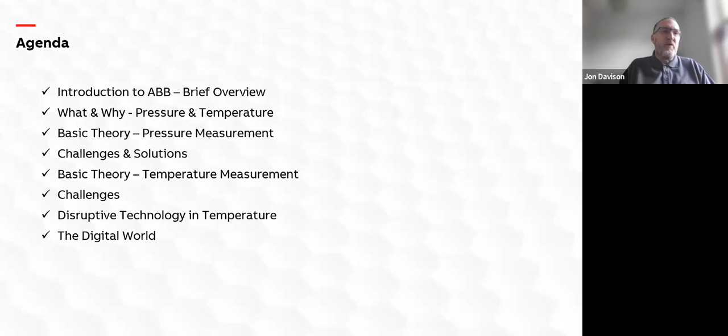And I love a measurement challenge, so please, at the end, if you get questions, throw them through, or we can look to arrange a separate session, as I think Sheila said earlier, it is a bit of a whistle-stop tour. Each of these topics I would typically spend an hour or more on, so it is very much a whiz through. Brief overview of what we're going to cover: what and why, pressure and temperature, basic theory, challenges, solutions on both topics, and also a little bit at the end on some disruptive technology in temperature and the digital world from the point of view of instrumentation as well.

So a very brief overview of ABB. We're a big multinational, we cover products like electrification, things like drives and motors. We manufacture robots, we have a process automation division, so Aidan and I sit in that division, which also sponsors Formula E. The process automation division is where the instrumentation products sit, so we manufacture a whole range of field and flow instrumentation, analyzers, flow meters, pressure, temperature, level equipment, analytic equipment for both liquid and gas, force measurement equipment, and we manufacture around the world. I'm not aware of any manufacture in Ireland, certainly for our part of the business, but we do manufacture in the UK, which is something we're very proud of in this day and age.

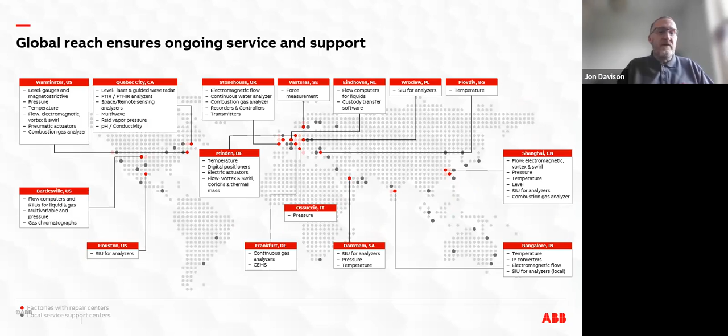So moving on to the topic in hand, what and why pressure and temperature measurement. I guess the first question really is, what is pressure? Well, pressure in very simple terms is force per unit area. I'm old school, I think in pounds per square inch. Modern terminology is kilograms per centimetre squared, but effectively they mean the same thing. It's the amount of force applied per amount of area, unit area.

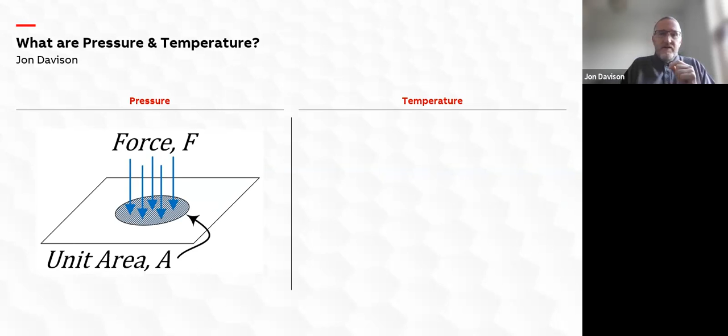Temperature is an interesting one because everybody thinks how hot or cold something is, but it's actually the kinetic energy, the particles, so how active the particles are in a product. And if something gets cold, they're less active; something gets hot, they're more active, but we use that to then determine the temperature of a product.

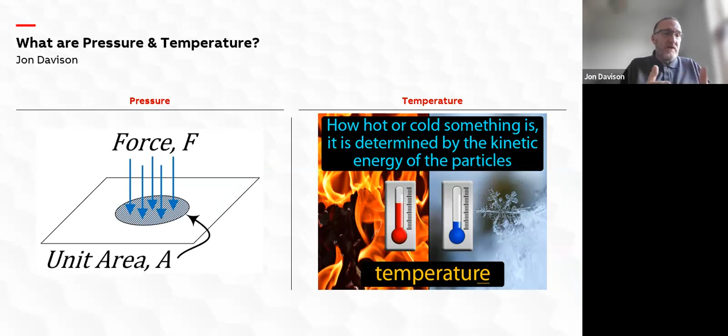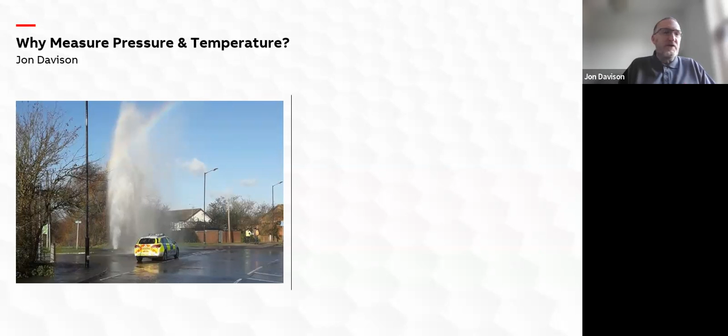Why measure them? It's a simple question. Well, there's a great picture in the press of one of our local water companies who had a bit of an issue, which is obviously very embarrassing. But also from a serious point of view, if you don't measure something, you can't control something.

So from the point of view of process safety, both pressure and temperature are quite critical. Also, if you want to optimize processes, you need to start measuring, especially temperature, but also pressure. As a good example, digesters: if you control your temperature, you can optimize the amount of biogas you produce. If you get it wrong, you don't produce as much biogas. If the temperature is too high, potentially you can kill off the bugs.

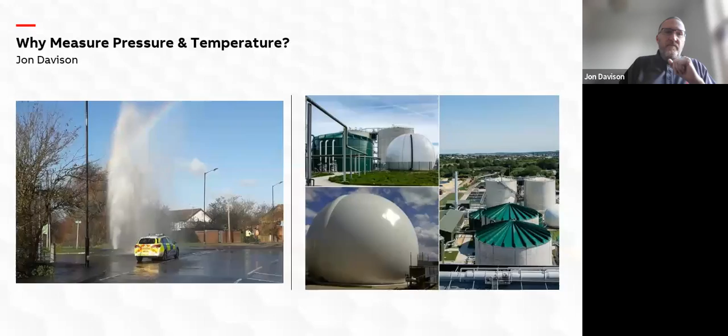Both pressure and temperature are used universally across both the water and wastewater process. This could be something as simple as temperature monitoring on a motor, through to pressure monitoring in tanks. We talk about hydrostatic level, but it's actually pressure monitoring, all the way through the process, really, through to the end where potentially you're doing final effluent. And again, temperature is sometimes used before it goes out into the water course.

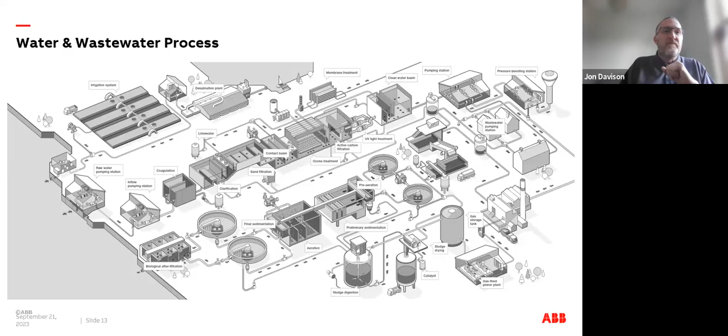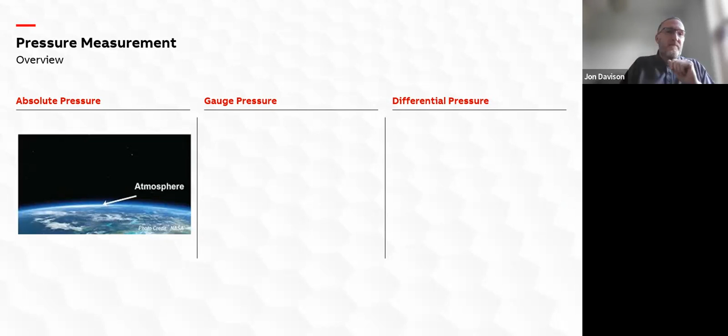So basic theory, pressure. Pressure comes in effectively three versions: absolute pressure, gauge pressure, differential pressure. Absolute pressure is effectively the reference point for the measurement. So if you're out in space, there's no atmosphere, so your reference point for absolute pressure is a full vacuum. Gauge pressure, well, where it's at on this planet, is then referenced to the atmospheric conditions.

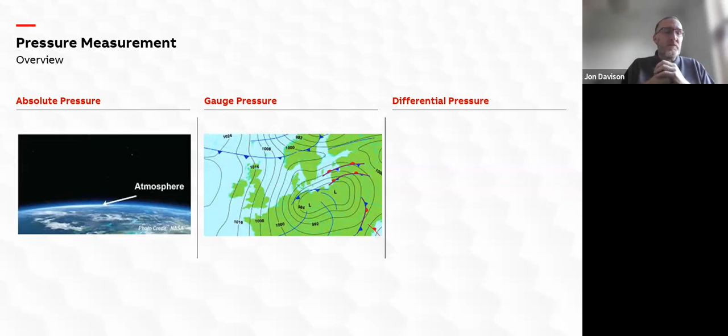Now, inconveniently, the atmospheric pressure changes. So gauge pressure devices are actually differential pressure instruments. What you're doing is you have one connection onto the process to measure the process pressure, and you then effectively have a compensation port in the device as well. Sometimes it's not always obvious, some devices it is. Differential, very simple, it's a measurement between two points.

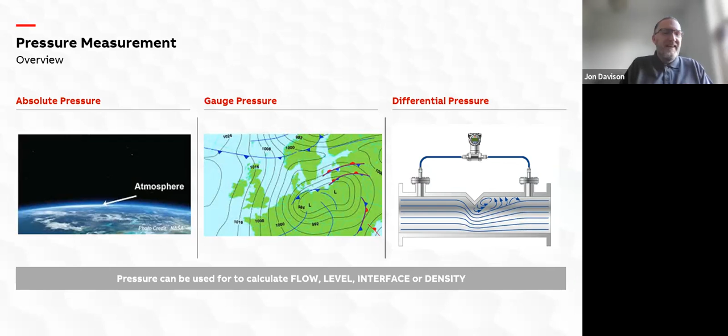So you can also use pressure. We're talking mainly about pressure here, but you can also use it to determine flow, such as the differential pressure example there, level, interface, or density. Interface and density are less commonly used in the water industry. As a matter of fact, I don't think I've ever seen one, if I'm honest, but certainly flow is used and level is definitely used.

Translating that into product, typically for a gauge or absolute pressure transmitter, you've got a single connection into the process. Differential pressure, you've got two legs, and you also have something called a multivariable pressure transmitter. That's effectively a DP transmitter, but also measures the absolute pressure, and you can put a temperature input into that as well, hence the phrase multivariable. You're measuring absolute pressure, differential pressure, and the temperature. That's typically used on flow applications where you're measuring mass flow of gases, less commonly used in the water industry.

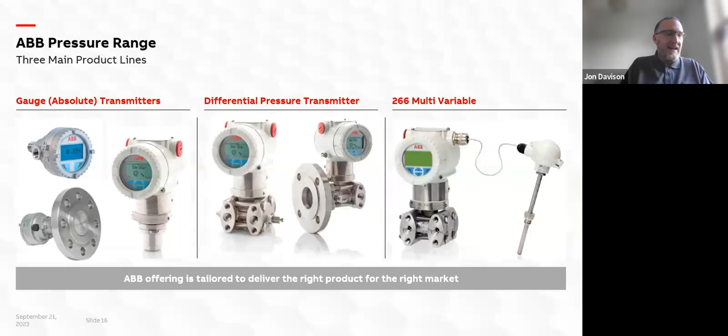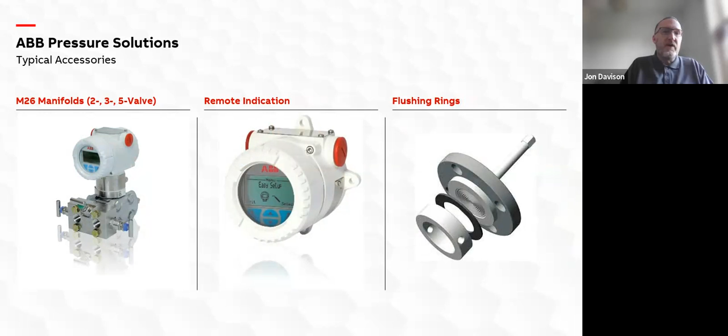Range of accessories. We'll be touching on some of these later, but effectively talking about manifolds for isolation, remote indication, because if your device is up in the air, sometimes you need to see it on the ground, and these wonderful things called flushing rings, which we'll touch on later.

So, typical pressure applications. Hydrostatic level: if your tank is open to atmosphere, if it's a vented tank, you only need a single connection to the tank, so you can use a gauge pressure device. Effectively, all that's doing is measuring the weight of the fluid in the tank. If it's a closed vessel and there's some gas in the headspace, then you would need to use a differential pressure device, because you need to compensate for the pressure in the top of the tank, which is also then pushing down on the weight of fluid in the tank.

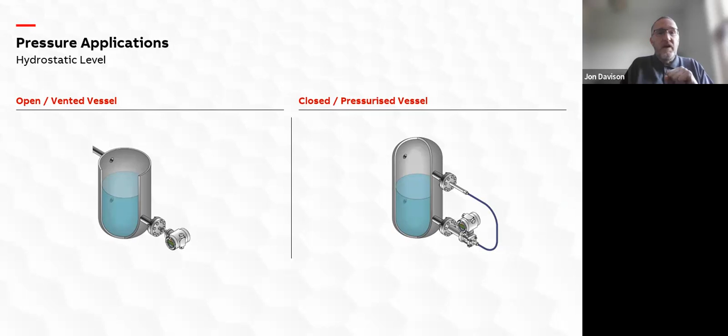So hydrostatic, two ways of doing it. You could use a differential pressure device to measure on an open vented tank; you just leave one leg open to atmosphere. Now, one key thing people sometimes miss on hydrostatic level: if your fluid is not water, you do need to compensate for the density of the fluid. So if it's a typical sludge, it will be a little bit heavier than water, so do compensate for the density. Normally you can do that within the device; if not, you can do it back at the PLC. You just need to apply a correction factor.

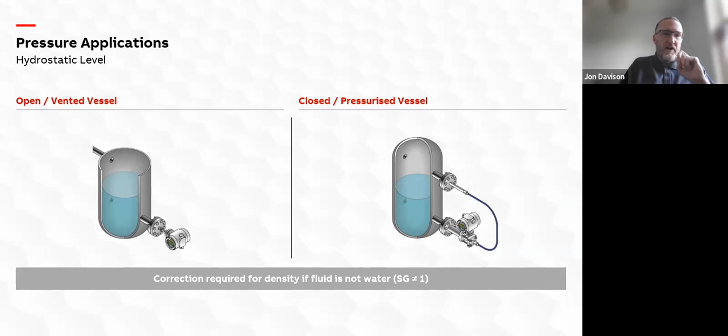Flow was historically quite common in the water industry, probably less so now, but you will come across it sometimes on things like aeration lanes, ozonation, those kinds of applications. Effectively, that's a two-part measurement system: you've got a flow element that sits in the line, and there are examples of some flow elements in the image there, and the pressure transmitter.

Excuse me, Jon, we're not seeing the presentation, we're just seeing yourself.

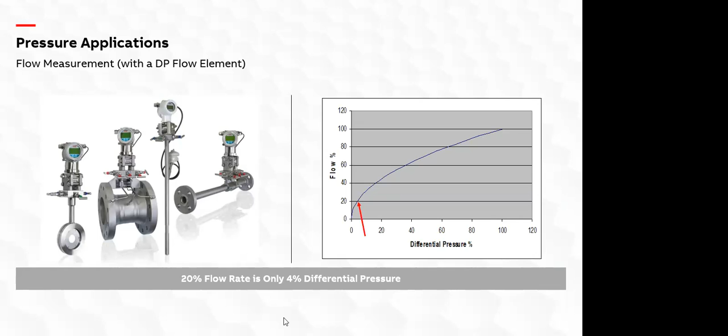Oh, really? Yes, okay, that's odd. No, Jon, I can see the presentation on you. Oh, can you? I'm only seeing Jon. Sorry, my apologies. Well, I guess if anyone else has a problem, ping something in chat. But if everyone else can see it, happy days. They can see it in the chat there. Brilliant, good, apologies. So that's all right, and it's worth shouting in.

So flow, less common now. Two parts to it. You've got the flow element, which sits in the line. Your pressure transmitter sits on top, and it takes the differential pressure created across the flow element and calculates a flow rate. Now, that isn't a linear relationship.

This is where you get something called square root extraction, because you get this non-linear relationship. You can do that in the pressure transmitter. Pressure transmitters these days are very clever, so you just set the device up to say you're measuring differential pressure but want a flow output. One thing to remember is to only do that in one place - don't do it at the pressure transmitter and at the PLC end as well.

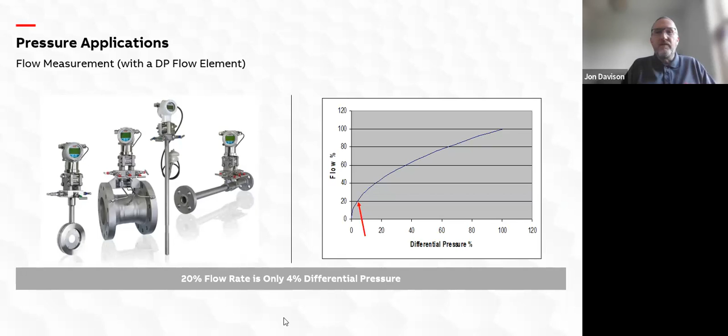Density interface, I'm going to skip over. I've very rarely come across that in the water industry, but effectively you're talking about a differential pressure device, and it needs both legs wetted.

So, golden rules - the devil's in the detail. What are you measuring? Gauge pressure, level, flow, the working range, the overpressure, fluid properties. All these kind of parameters is what us as ABB or other suppliers will come and ask you lots of annoying questions about, because we need to define exactly what you're doing. Do you just want a gauge pressure device? What's your process connection? Is it going in a hazardous area?

That's a very simple one, but once you get into things like level, we might ask a few more questions. It's also worth letting us know issues like if it's a condensing fluid, if it's a fluid that solidifies, if it's abrasive, corrosive. Again, we will tend to recognize a lot of the applications, but sometimes your own operational experience is very useful as well.

Process temperature, location, and environment - so you consider the right mounting point. If it's going on a gas service, especially a gas like biogas, but there's potential of condensation, just consider where you're going to mount the instrument.

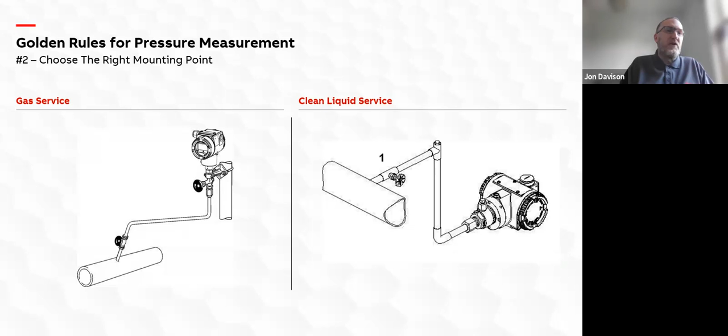Because if you've got the instrument mounted as the example on the right here, and that condenses in that leg, you will get measurement errors. So what you need to try and do on something like biogas, where potentially it'll condense, is allow any condensation to run back into the pipeline. These kind of things are covered in the manual, but I never read the manual - I don't think most people do. So just really think about where you're mounting the device and whether it's going to create problems.

If you're remote mounting the transmitter, so it's not mounted directly on the line, typically people have used something called an impulse line, which is just a piece of pipe going from your pipework to the device.

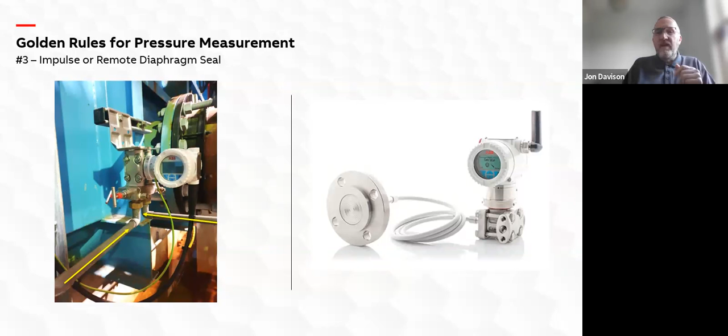So what we're doing here is effectively taking the impulse lines away and fitting a diaphragm seal to the assembly. That diaphragm seal is then sealed at the process flange end or the process tank end, and the capillary you can see there, coiled up, acts as your impulse line. That can resolve some issues you sometimes see on certain applications.

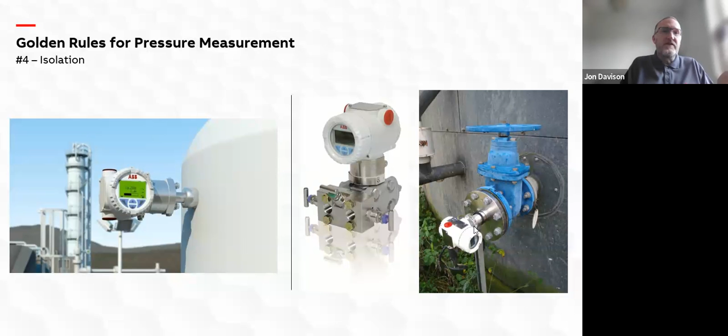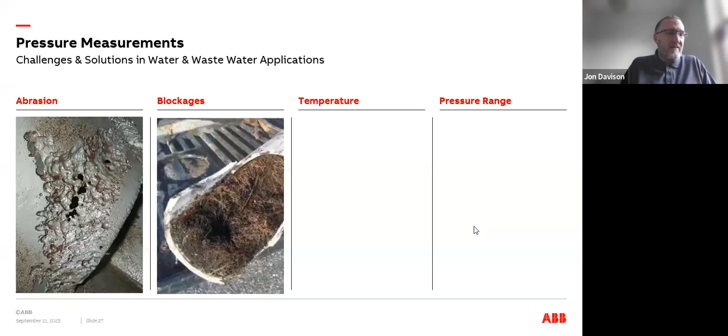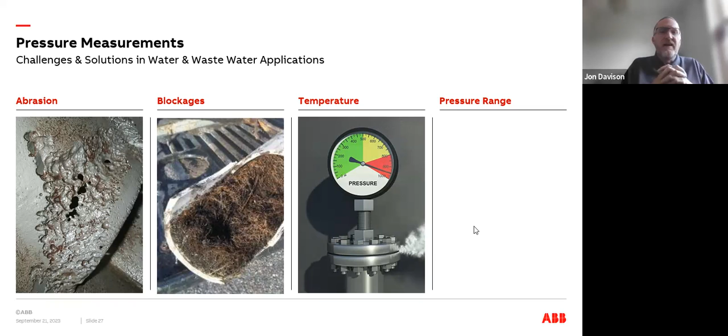Blockages - unfortunately, by the nature of the product in the waste industry, the stuff can solidify. You can get ragging issues, things like that. So blockages can be a challenge. Temperature - does it get very cold, can it freeze, which we touched on earlier. But also you can sometimes come across boiler applications, especially where you've got CHP or THP producing biogas. And the last thing really is just your pressure range.

So those are kind of your key challenges and solutions we'll be looking at. So abrasion, typically where? Well, we've touched on that already - anywhere where you can get an abrasive particle come through. The easiest way of mitigating issues with abrasion is just to consider your mounting. So just try and mount your device so it's not going to wear effectively. Now there's lots of ways of doing that.

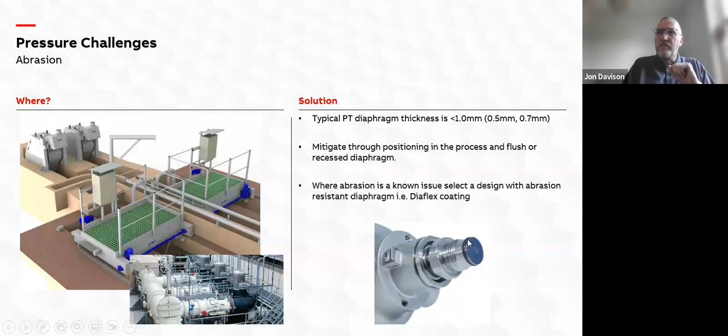A recessed diaphragm or a flush diaphragm is a simple way of doing it. Where you do have known issues with abrasion, you can get very hard coatings on the diaphragm of the pressure transmitter. The picture on the right-hand side shows an example of what's called the Diaflex coating on a typical pressure transmitter. Diaflex is basically a PVD coating - physical vapor deposition coating. It's designed to be a very, very hard coating, very similar to the sort of coating you'd put on tools to make your drill bits last longer, that kind of thing. But it really does extend the life of the device. Other coatings are available - that's an ABB solution - but whoever you select, if you see abrasion problems, just think about this kind of solution to extend the life of your device.

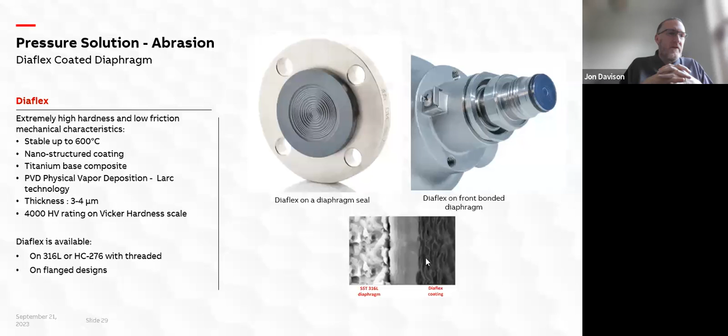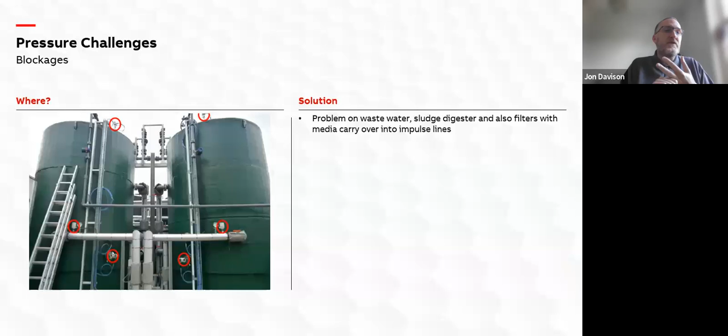So that's abrasion touched on. Blockages - well, where? That's an image of a digester with some of the pressure instruments highlighted. Effectively, anywhere on the waste side, you can get problems with blockages. Some examples: sludge digesters, and actually filters - so we get RGF or GAC filters on the clean water side, you can have problems as well. Sometimes you get filter media carryover into impulse lines, so that can cause problems with the device. Not so much blocking, but it causes measurement problems with the device.

Lines freezing - there's an example of blocking a line. Simple solution: use a flush diaphragm, as shown in the previous and the next slide, or use a diaphragm seal, really to minimize risks. Isolation for the process, we touched on earlier, is essential for checking and cleaning. And if you do have a flange design, this is where flushing rings really come into their own - mount a flushing ring so you can do in situ flushing and also in situ calibration checks without having to take the instrument off.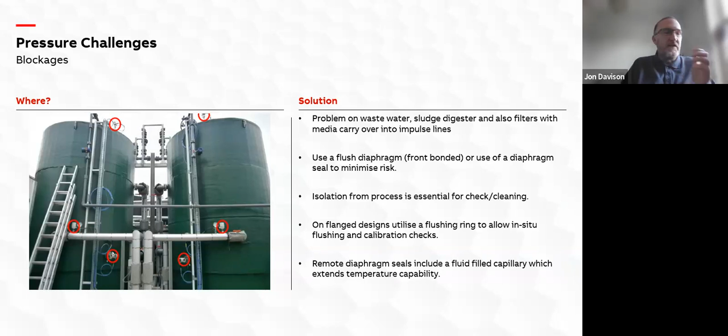Sometimes diaphragm seal design is useful, as we touched on earlier, if you need to remote your device away from the process because it's convenient or because of accessibility. This is where you can also mount what's called an extended diaphragm. So if you've got a standoff point which could potentially block, extending your diaphragm keeps it flush inside the vessel or the line.

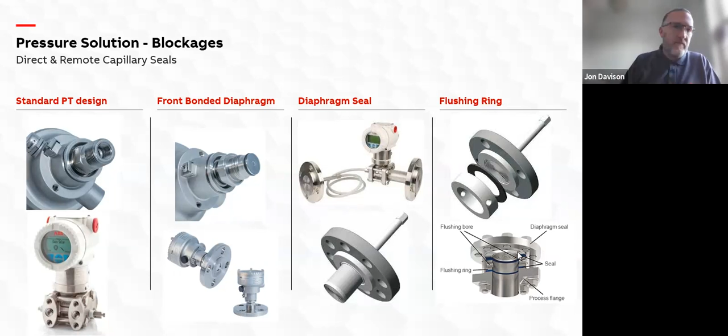The last thing is really just a flushing ring example. The flushing ring is the disc, typically a 1 or 2 hole disc, stainless steel or other materials available. It's designed so when installed, your flushing ring is sandwiched between your process flange and the instrument flange. You can isolate it from the process and use the holes to flush it through with water or air. Once you've flushed it through and cleaned it, you can then come along with a calibrator and calibrate it in situ.

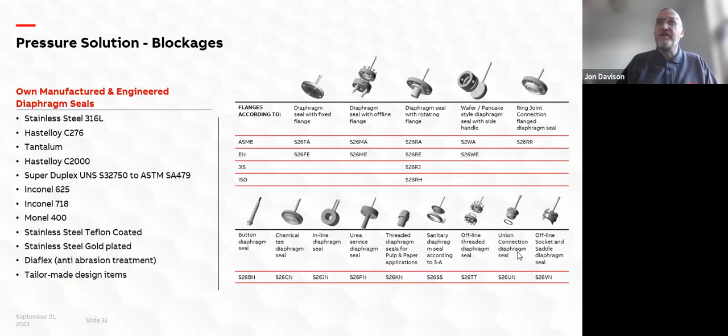Diaphragm seals, we've talked about a lot. There's a whole range of diaphragm seals - I could talk to you for more than an hour just about diaphragm seals. Typical examples we'd use in the water industry are some of the examples here: flanged with a fixed flange or a rotating flange, sometimes with an extended diaphragm depending on the application. That little seal at the bottom is a front bonded design, effectively the diaphragm's at the end, but it's a threaded design so you don't have to go for a flange, which is sometimes very useful on process lines.

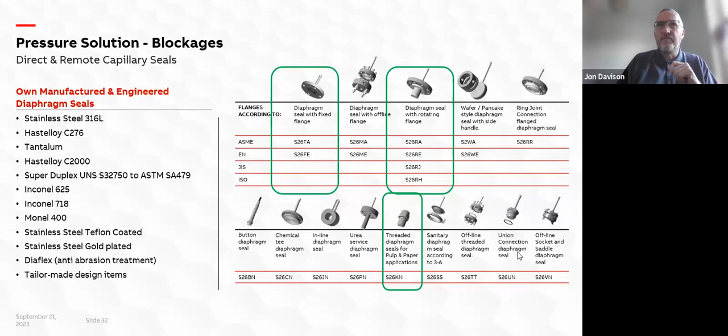Key thing with diaphragm seals is you can buy them with a device, or buy them and fit them separately. We always recommend supplying them with the device, purely because when we assemble this as a complete assembly, it comes already attached and tested to the instrument. We fill them under vacuum conditions, so we make sure there's no air in there.

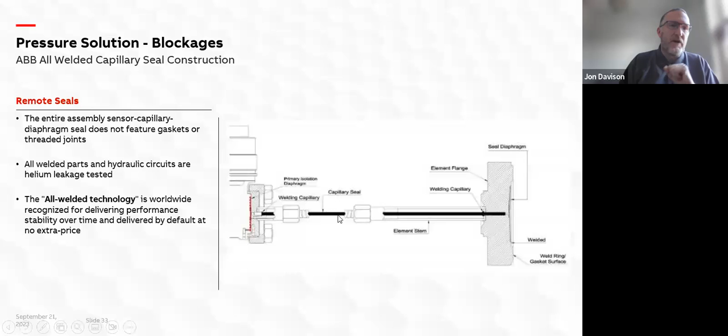A capillary seal system is effectively a hydraulic system. The process is on the right-hand side of the image, pushing on the diaphragm, and you rely on hydraulics to transfer to the instrument sensor. What you don't want is air in there because it causes measurement issues. This is why we recommend it comes as a single assembly.

So that's touched on blockages. If we move on to temperature, really there are 2 challenges. Is it hot, which you'll typically see on CHP or THP engines generating the biogas, where you've got things like boilers - your boiler can run at 200 degrees plus. That kind of temperature is normally outside the range of a standard pressure transmitter. Or does it get very, very cold? Can you have problems with freezing if it's outside?

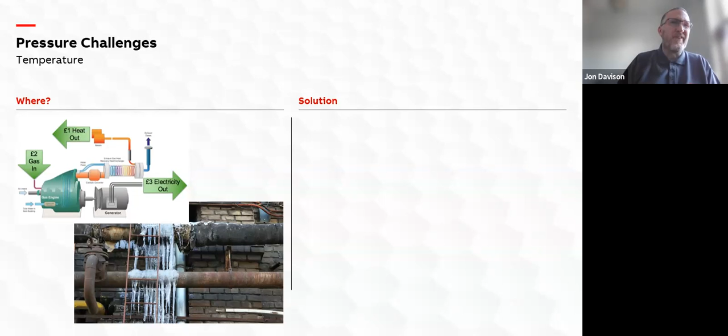So where we've got these on things like process tanks, generally the approach is just separation. What you do need to consider is what the impact on the process would be if you do separate it. For example, if it's a liquid and you cool it, is it going to solidify? If it's a gas and you cool it, is it going to condense? And again, you then need to consider the mounting requirements.

The other option we can look at, if it's high temperature or actually if it's low temperature, is to move to a diaphragm seal system. The standard device is rated to about 120 degrees C process temperature, but by using a diaphragm seal system, you're effectively removing it away from the hot stuff, and it really extends the capability of the device. By moving to a diaphragm seal system, you can get designs up to around 400 degrees process temperature, depending on the fill fluid you pick. It really helps where you have to have the device direct mounted and don't want separation.

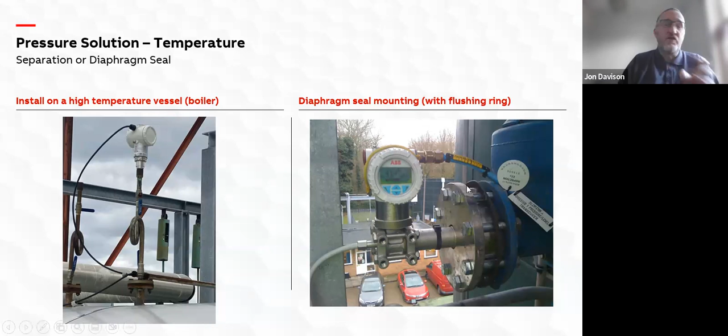Pressure challenges, pressure range. The key thing here is to look at what you are measuring from a range point of view and select the right device based on that.

I've given an example based on two ABB products. We manufacture a mid-range product called the PGS 100, which has a whole range of sensors depending on your measurement range. If we pick a 400 millibar sensor in that product, its maximum overpressure rating will be 10 bar. If we go to the next product line, the 266 HSH, with exactly the same 400 millibar sensor range, that device is capable of a much higher overpressure range, 140 bar, and it will recover from that - that's the key thing. You can overpressure that device, bring it back down to 400 millibar, and it will still work.

So think about the whole requirements of the application. If you've got these mounted on things like pumps, especially pressure boosters, they can generate quite a high pressure spike. You don't want to keep breaking your pressure sensors because you're going past your overpressure range, so do look at the whole specs of the device.

Also, if you're measuring very low pressures, at the very low end of the range, sometimes it's worth moving from just a gauge pressure instrument to a differential pressure instrument, because that can give you a much lower range capability. So again, just look at the specs very carefully. I'd encourage you to discuss this with the supplier because we are the experts in our own products, and as long as you give us the necessary information, we'll look at what solution fits you best.

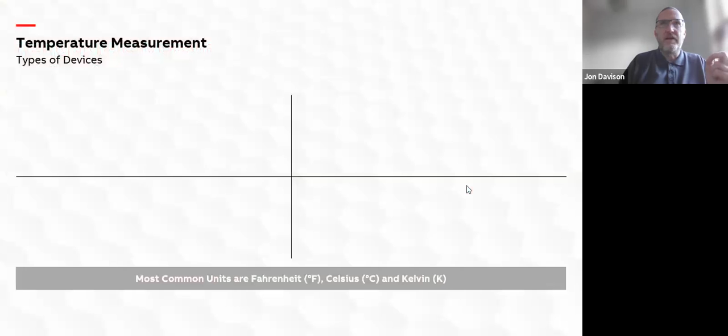Temperature measurement, types of devices. We've got purely mechanical devices, like the old liquid-filled thermometer you may remember from your childhood - I do, with the doctor sticking it in your mouth to measure your temperature, though these things are electronic now. You can also get bimetallic systems here, so as the temperature changes, it flexes this assembly and picks it up on a pointer scale, which you can also have a rotary transmitter connected to.

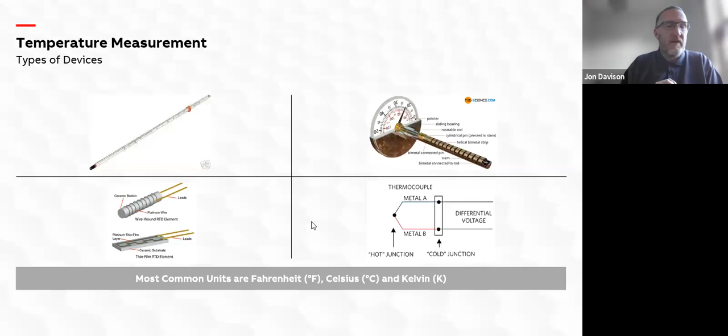Probably more common for process measurement is a thermocouple - you might be used to this at home for your heating, typically with a simple bimetallic strip, which is effectively a very basic thermocouple. But there's also something called a resistance thermometer, or RTD. The most common unit I come across is Celsius, but in scientific communities you'll see Kelvin. When I deal with our American colleagues they always talk about Fahrenheit, so I instantly have to convert that to degrees C, but the most common we see is degrees C.

So the most common measurement device for process measurement in water and wastewater is likely to be an RTD, and that's commonly what we supply, less likely a thermocouple. The main reason is thermocouples don't tend to be as accurate - an RTD covers the range you're going to work across in the water industry without any problems, and is actually far more accurate than a thermocouple.

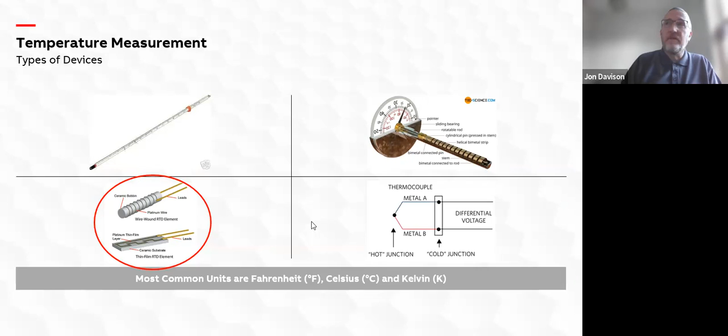So what is an RTD? A resistance temperature detector - effectively an element that changes resistance as the temperature changes. You can get thin film designs, where you basically spray something on a substrate - that's one design we can supply - but you can also get wire wound designs.

Each has their own benefits. The thin film design tends to be a little bit cheaper, but doesn't tend to be quite as robust. When I make that comment about robustness, a thin film design will quite happily sustain 10G, which most people don't need. But if you get much higher vibration levels, this is where a wire wound sensor comes into its own. Also, a wire wound design will cover a much wider temperature range, doing minus 200 up to around plus 800, whereas a thin film is around 400 to 450 as a maximum. But again, that's perfectly fine for, I think, all applications in the water industry.

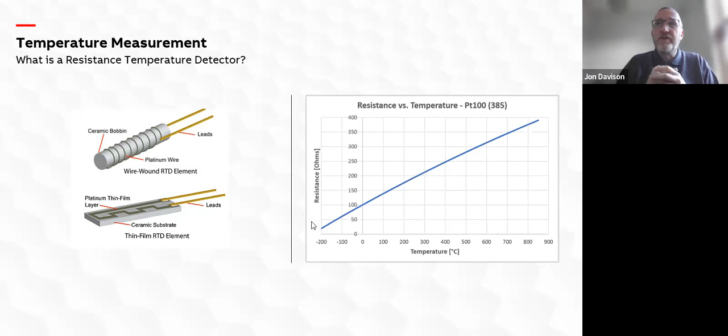Relationship-wise, it's not quite a straight line. So you'll see these as PT100. What that means is at 0 degrees C, that's 100 ohms. You can check a PT100 very, very easily - you can go and measure the resistance the device is giving you, and check it's correct because you know it's 20 degrees today, you know what the relationship should be, and you can just pick it up on the lookup table.

So the most common type of RTD is PT100. There are other types available - PT1000 is sometimes used, typically because that gives you historically a much better resolution, and that tends to be used scientifically. So sometimes some of our analytical kit uses a PT1000, but actually with modern electronics, PT100 performs probably just as well.

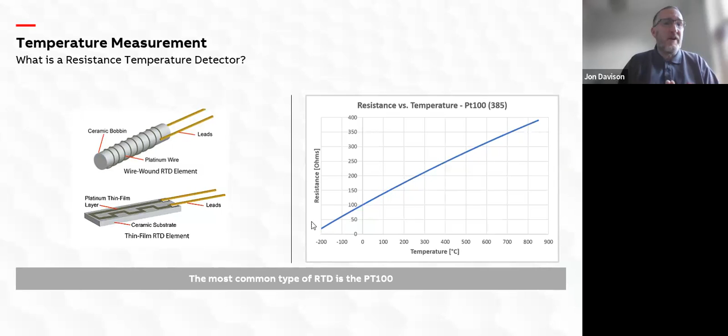3-wire, again, is probably the most common. Unless you've got a particularly long cable run between where your sensor is and where your transmitter is, then people would typically go for a 4-wire. I tend to specify them as a 4-wire design, purely because 3-wire and 4-wire cost the same. But you can connect a 4-wire design as a 3-wire, whereas obviously if you've got a 3-wire, you can't connect it as a 4-wire. So I tend to suggest people go for 4-wire.

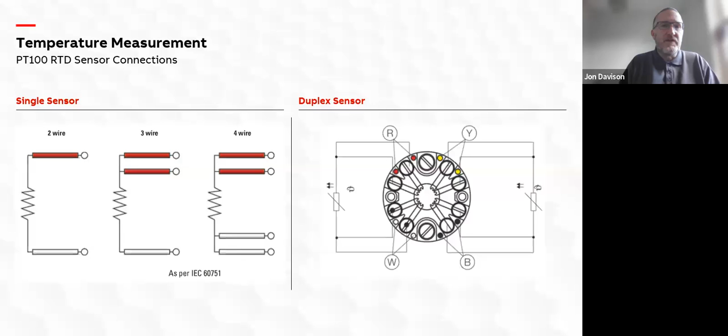Duplex sensor - so you might come across something called a duplex sensor. That's effectively 2 of these all within the one element, so you've got 2 sensors within the one device. So that's your basic element.

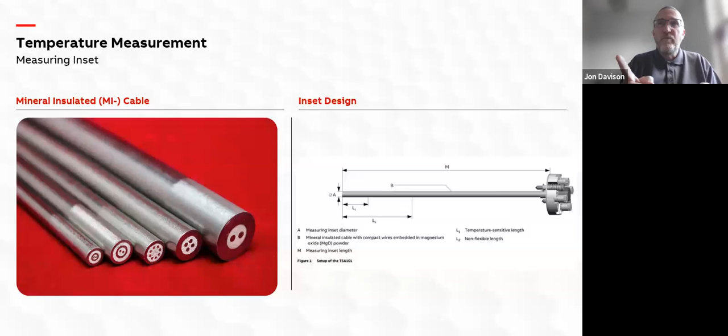What you then do is package those into what's called an MI cable, mineral insulated cable, because the basic sensor is not suitable to be put into your process, and not suitable to be left out in the open environment either, as it will affect the sensor element. So you package them up effectively to protect them into an MI cable. That looks like a solid rod, and actually when they're quite short, it is solid. But when you get very long runs - I've seen runs 11 meters or longer - they coil up, so it's effectively like a cable. The key thing is your measurement is at the very, very end of that. So that sensor we talked about, your PT100 sensor, is sat very much right at the end of that element - that's your measuring point.

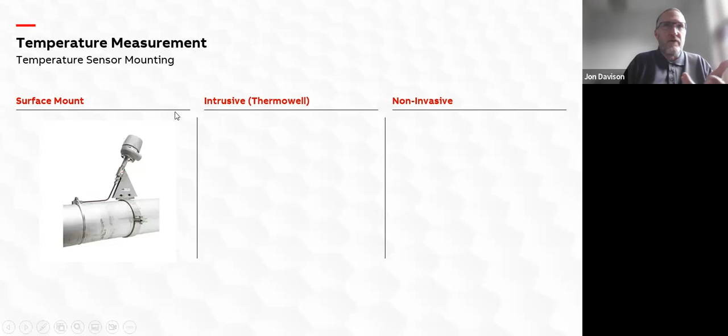So we've talked about how we package these things up. Okay, that's great, but how do I now turn that into an instrument? Well, typically they come in 3 forms: a surface mount design, where it's literally just clamped on the outside of the pipe - so the clamping arrangement, your sensor will be sat here, and this is your connection off to the process. So you might have a transmitter or something sat in the head there.

An intrusive design with a thermowell - so what you're then doing is putting your temperature sensor, your RTD, within a thermal well. A thermal well is purely there to protect that element, because you're then going to put this into water or sludge or a boiler or a chemical that's potentially quite corrosive. That thermal well, its only job is to protect that sensor.

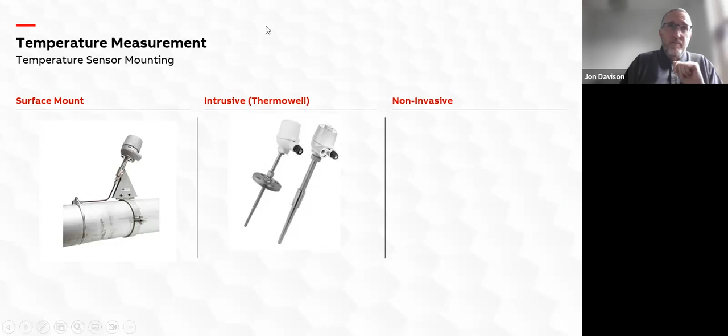And probably the most common design you see within the industry is the thermal well design, so it's inserted into a thermal well. Also, more recently, non-invasive designs have started to come to the fore as well. The advantage of a non-invasive design is it works just as well as a thermal well design, but you don't need a hole in the pipe.

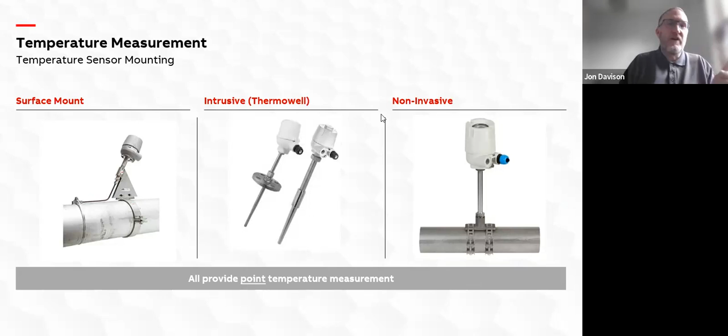All these three solutions provide point temperature measurement. So if you want to measure a number of points in a digester, you need a number of instruments.

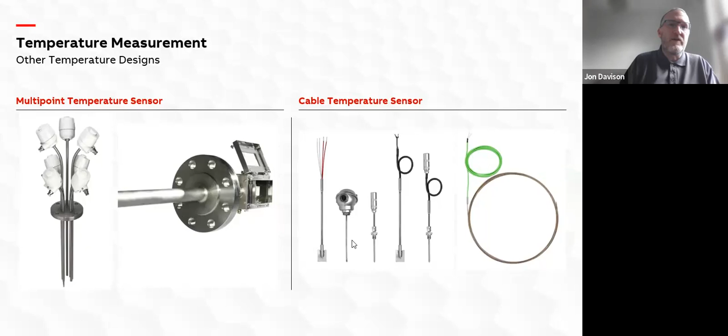So installation practice - again, this is where the devil's in the detail. Required immersion length - this is where we're talking about on a process line. If you're mounting this on, let's say, a 6-inch line, we recommend around a 1/3 to 2/3 insertion in the line. Most people go for 1/3 because it's much easier than 2/3 insertion. That's the general rule of thumb used. So for a 6-inch line, you need at least 2 inches in the pipe.

But do consider your nozzle standoff as well. If your nozzle height is 4 inches and you want 2 inches in the pipe, that's a 6-inch length, 150 mil length thermowell. Do consider that - we sometimes see people caught out like that. What you don't want is your temperature measurement set up inside the nozzle, because then it just won't work accurately.

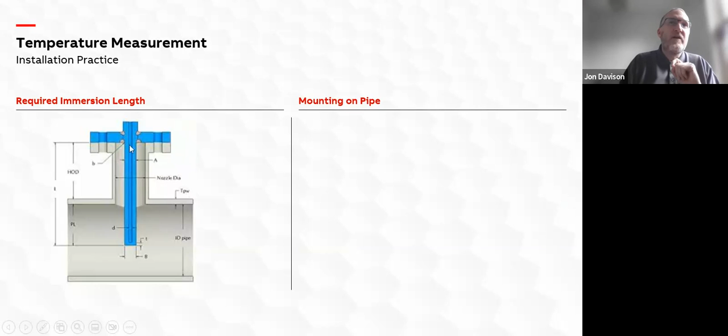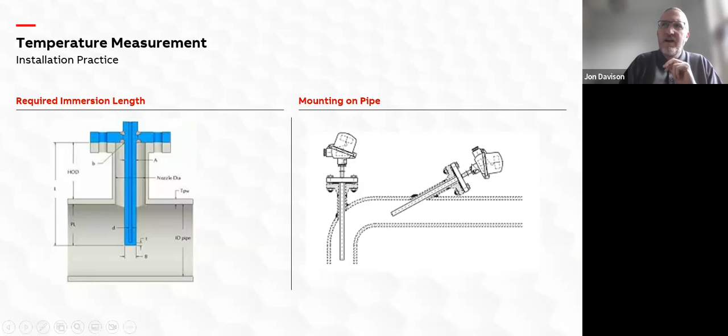Mounting on the pipe - if you've got a very small pipe or other mounting constraints, you can look to mount them on things like elbows, which can help if you've got a particularly small line. You mount them at a 45-degree angle, or on an elbow. That can also help where you've got specific application problems, some of which we'll touch on later. So if you've got a product that's liable to block, mounting at a 45-degree angle can help.

Key considerations: define your requirements - we've touched on that already. How long? How long is the piece of string? We quite often get inquiries for temperature devices where people say, I want a temperature device to measure 0 to 100. You're like, okay, but how are you connecting to the process? What's the line size? What are you doing with it? Try and give us as much detail as you can.

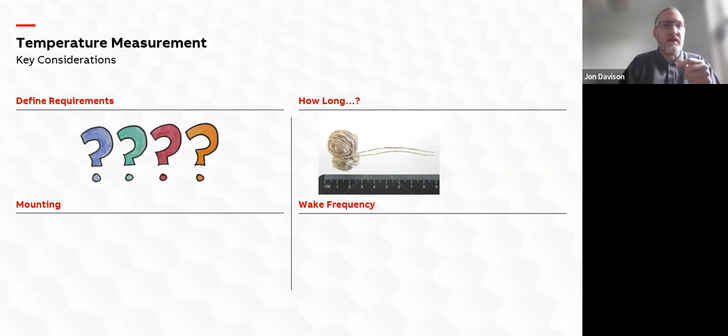Mounting, we've touched on - do you want surface mounting, do you want it in a thermowell, or can you go for a non-invasive design?

The last thing is wake frequency. The flagpole's a good example of this - imagine that flagpole is your thermowell, and as the breeze goes past it, your flag flaps in the breeze. So on some applications you will have to consider wake frequency. There's a good example of what can happen.

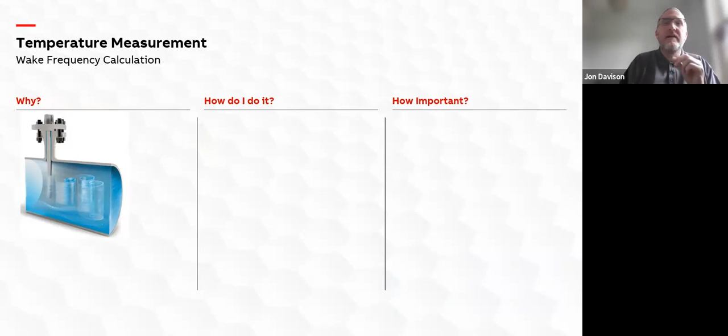You get these eddies as the fluid passes down the pipe, and as your fluid flows down, it will try to push that thermowell forward, but these eddies will also try to swing it side to side. So what you may need to do is a wake frequency calculation.

There are two standards for this - a DIN standard and an ASME standard. ABB doesn't have to do it, but we can do it for you if you want, and other suppliers can do it as well. Certainly if you're on things like boiler applications, anything with high velocity, do think about your wake frequency calculation. On your standard sludge applications, at 0.5 meter a second velocity down the pipe, I wouldn't worry about it - it's never going to be an issue unless you've got a particularly long thermowell for some bizarre reason.

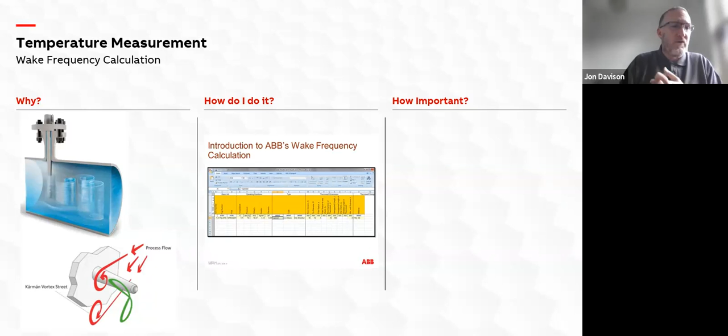But certainly anything with above 1 meter a second, certainly above 2, if you're on the sludge side, do think about wake frequency. It's important because effectively you can shear off that thermowell, and they tend to go at the mounting point, so where it's connected into the process, be that a thread or a flange, they tend to shear off.

Now, okay, if it's the brown stuff that's in the pipe, that brown stuff now has a pathway up into your electronics and into the outside world, which isn't ideal. But if that's a steam line, obviously you can see the implications are potentially far more serious.

So I would say do always have a little think about it. If you're not sure, ask your supplier: do I need to think about wake frequency? And we will have a feel for whether it needs to be done, and actually we can do a draft calculation just to check if we feel it may be an issue.

And what you'll get is basically a pass or fail. If it fails, we'll really look at the design of the thermowell, and that might be go for something a bit shorter, go for something a bit thicker, maybe look at one of the other solutions that's available if we can't get it to pass.

And I know from my own experience, some applications where you need to cover a normal operating condition, but actually a failed design condition - it passes fine under normal operating conditions, but under the theoretical design fail conditions, if something fails in the process, we could see these conditions. Sometimes the wake frequency will fail into those conditions, so effectively you then need to go re-engineer your thermowell.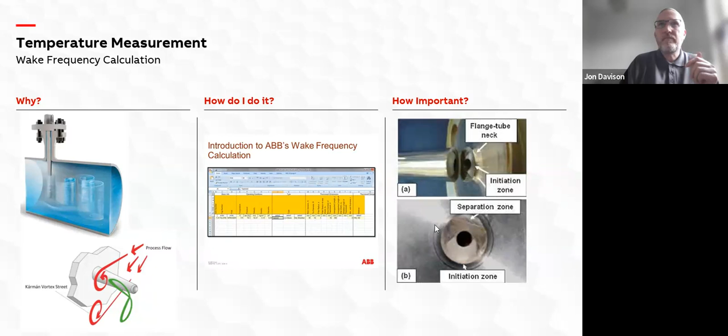So typical applications - there's a whole swathe of these in the water industry, from oil monitoring and gearboxes, motors, those kind of things. If your motor runs hot, you need to know before the thing catches on fire.

Digesters and tanks, so side mounted in digesters, top mounted in digesters. The longest one I've supplied on a digester was 11 meters. Just bear in mind, if you're mounting it on the top of the digester and your thermowell is 11 meters long, you then need to lift it at least 22 meters in the air, so you need a very big crane.

Wells and chambers - so sometimes you monitor the conditions in a well or a chamber just to make sure you're not under septic conditions in there.

The one thing I would say about if you're going to mount it in a well or a chamber: this design here, thermowell is all stainless steel, but this was also supplied with the stainless steel housing, whereas if you look at the design on the left, that's an aluminium, purely because that environment in there is quite aggressive. So if you put a standard housing on there, potentially that will corrode and within probably a year or two, decay and die. So again, just think sometimes about do I need to go for a stainless housing - yes, it costs me a little bit more, but it means I'm not going to replace my instrument every couple of years. Process monitoring on pipelines, very, very standard.

Be it sort of sludge, be it water, be it steam, even actually aeration lines - thinking about it, sometimes they go on aeration lines. What you don't want is the air to get too cold in an aeration line, because potentially you get fluid condensing out, and that affects the efficiency of your aeration.

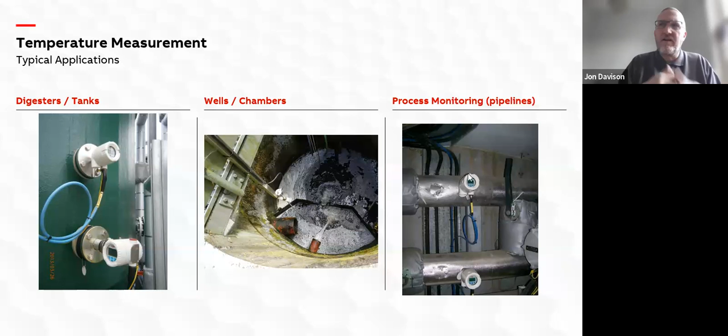So key challenges, very similar to the pressure transmitters in a way - abrasion and corrosion. Not so commonly seen, but if you are measuring in perhaps one of your dosing tanks, something like that, so if it's a caustic tank or something similar, do let us know, because you might find stainless steel only lasts a couple of years, and maybe we need to go for a Hastelloy or something similar, or a coated design.

Abrasion tends to be less of an issue. I know some sites have a problem, but that tends to be a problem over quite a long time, and again, you can mitigate it through some of the mounting practices we've discussed. Wake frequency, we touched on that already, and the importance, because you don't want this thing to crack.

Product buildup and ragging is probably the biggest issue. You'll see, certainly on the waste side, where because you've got a thermowell design stuck into the process, you can get buildup. You're going to have to remove them, you're going to have to clean them. And if you've got a thermowell system, historically there was no real solution to that other than just maintenance.

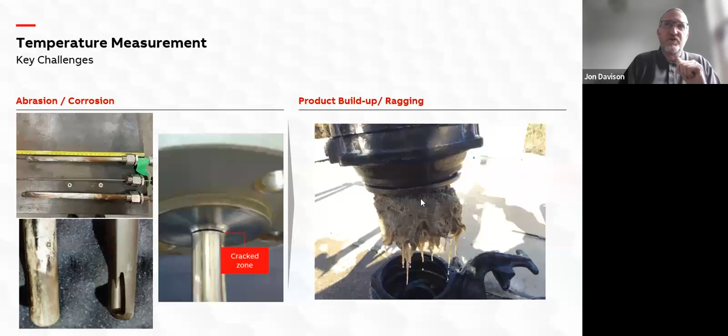But this is where now, with the introduction of new technologies, new non-invasive technologies, you now have an alternative. So this is what ABB call the NINVA. This is the non-invasive system.

A traditional thermowell is inserted in the pipe. The non-invasive clamps on the outside of the pipe, so there's no shutdown required. You can mount it on a process live. There's no holes in the pipe, so obviously that gives you a major safety benefit. And there's no engineering consideration, so you don't need to think about your nozzle, you don't need to think about wake frequency calculation.

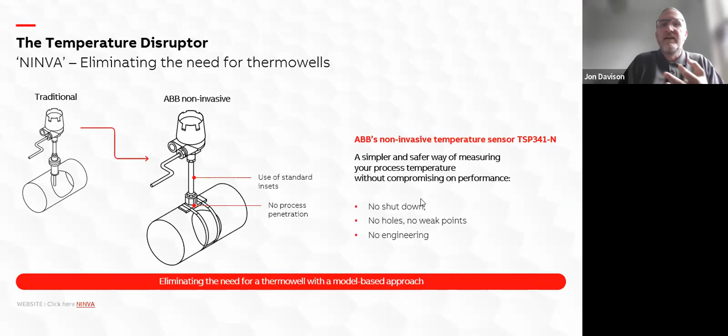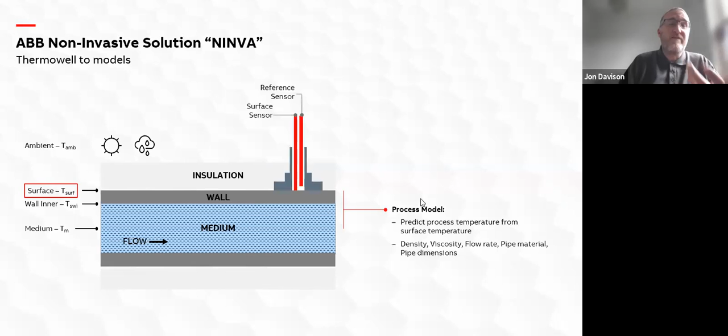So how does the thing work? Well, conventional invasive thermowell, you put your sensor into the thermowell, your sheath if you like, and it measures at that point in the process. The non-invasive, we're effectively using the pipe as the thermowell, is the best way of describing it.

Unlike a conventional surface mount system, which only has a single sensor, we actually use two sensors for our non-invasive design. So you've got one that touches the pipe wall, and it has to touch the pipe wall, not the insulation - it has to be in contact with the pipe wall. And the second sensor is a reference sensor, purely to correct for the changes that happen within the ambient conditions, the environment on the pipe.

Setup wise is very, very simple. To set up a non-invasive device from ABB, you literally just put your measurement range in. But what we do is we do a minimum amount of pre-qualification, if you like, which is we talk about, okay, what's your pipe schedule, what's your pipe size, what's going through the pipe. These are basic conditions that we would ask probably anyway for a thermowell design, so we ask very, very similar questions.

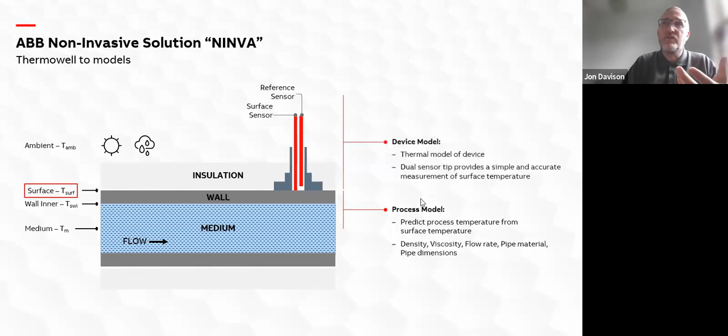And what we'll do is we'll run it through what's called a performance predictor, just to make sure the device is suitable. Because it's not suitable for all applications with non-invasive, but it's suitable for a lot of common applications. Line size range, actually smaller than DN25 now, we can go down to DN15, all the way through to a 2.5 meter line. Pipe has to be metallic - certainly at the moment, we are working on getting the design to work on other pipe materials, but at the moment it has to be metallic.

Temperature range, -40 to +400. That covers, I think, all your water industry applications. You can use it on liquids, steams, gases. We do look at gases a little bit more carefully - actually, ignore the density one because most gases are below that, but that's just because we look at it a bit more carefully. The one thing you do need to look at a little bit carefully is your fluid viscosity.

So your typical CHP at 6% dry solids sits well within that range. If you're in the thermal hydrolysis range, the THP range, which can be up to 20% dry solids, you'll probably find it sits outside that viscosity range. The reason why we're interested in the viscosity is because we do a calculation of the Reynolds number as part of our performance predictor, and that's just to check the flow conditions in the pipe, because what we want in the pipe is turbulent flow conditions.

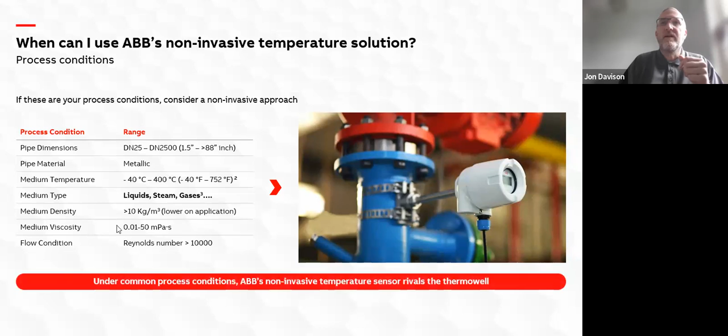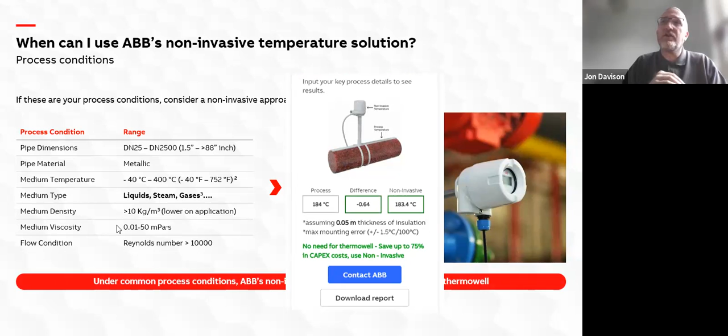So that's a typical calculation. That was one that was done on steam, 184 degrees steam, and it's comparing the process temperature to what a non-invasive design will give us, so you can get a rough calculation of what the error would be. That's an example on steam.

But what it did mean is you could hot fit or live fit the non-invasive, because you're not putting a hole in the line - you are just mounting it on the outside of the pipe. So no shutdown required to mount the non-invasive.

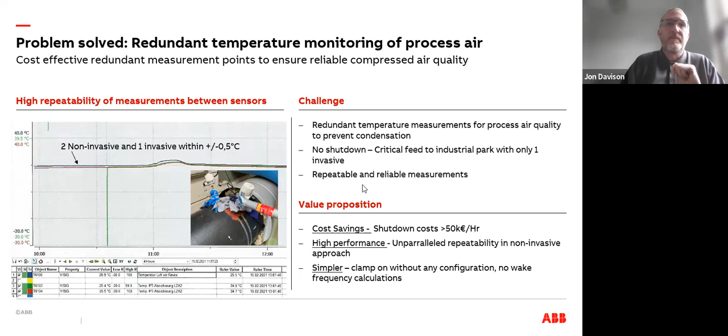We've got lots of examples of the non-invasive. So let's see if I can pull this screen up. Hopefully this works. I've talked about this performance predictor. Hopefully you can all see this, if not I can show it at the end. The performance predictor is effectively an online tool, available to yourselves, we don't have to do it. Generally we do, because we take that burden, if you like.

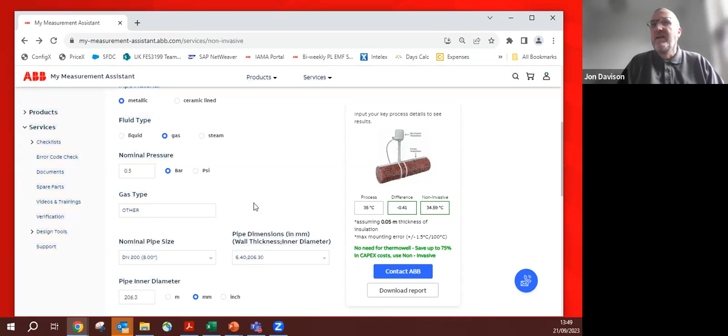Here's an example I did for an aeration line, running at about half a bar. I put it in air, 8-inch line with a 6.4 mil wall thickness, running at about 35 degrees. You can see the difference is 0.4 degrees C, which is comparable with a standard thermal well design.

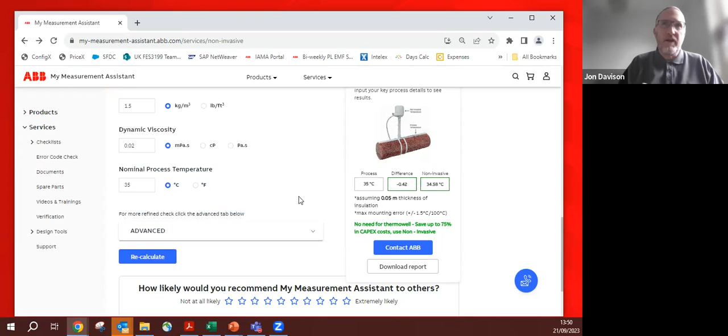Sometimes people will say, well, what if my wall thickness is a bit thicker? Okay, I'll change that to 8 mil, and I can just scroll down. It's now so easy. Then we do a recalculation, a little bit thicker. It's made a tiny difference - your wall thickness makes very, very little difference. We tend to have a feel for what works in an application and what doesn't. If we have any doubts, we'll do this performance check just to run it through.

The other beauty of doing this is you can download it. So we can generate this, download it, send it to you, or you can generate this yourself. The link's at the top there, or it was at the top there. So you can do this yourself, you've got ready access to the tool as well. There's nothing secret about it, it's just physics, effectively. So that's the digital world - I think we're on to pretty much the last slide.